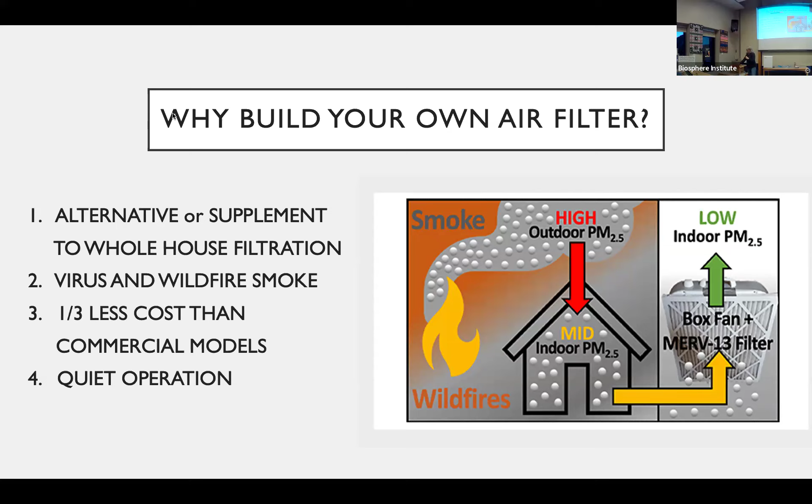So this is what the Corsi-Rosenthal box looks like. It's basically just four filters, four MERV 13 filters, with a box fan on top, and it's all just duct taped together. And I watched a video where a 10-year-old boy put one together. Easy.

The only downfall I think with this is a couple things. It's a bit noisy. You can buy quieter box fans, but it tends to be noisy. And it's also a bit bulky. So you can use different size filters around the square there, but you know, it works great in the classroom, but I think for a bedroom, it's just a little big.

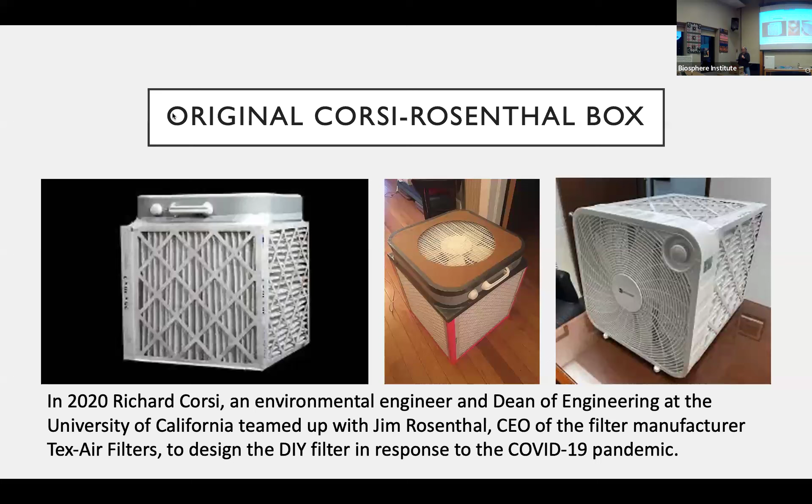There are different designs that have been coming out over the last few years. The first one there is, I think, one of the first designs that used the computer fans, which is what we're using, because they're very quiet. So instead of a big box fan on top, there's computer fans at the top, but still the same MERV 13 filters all the way around.

The second picture there is one, and you can use any size of filter, right? And so this is for a car. And I think this will be my next project, is to build one for a camper van, because I remember last summer traveling through BC and through some smoky areas and pulling into a campground and wishing that I had this with me or something. The vehicles.

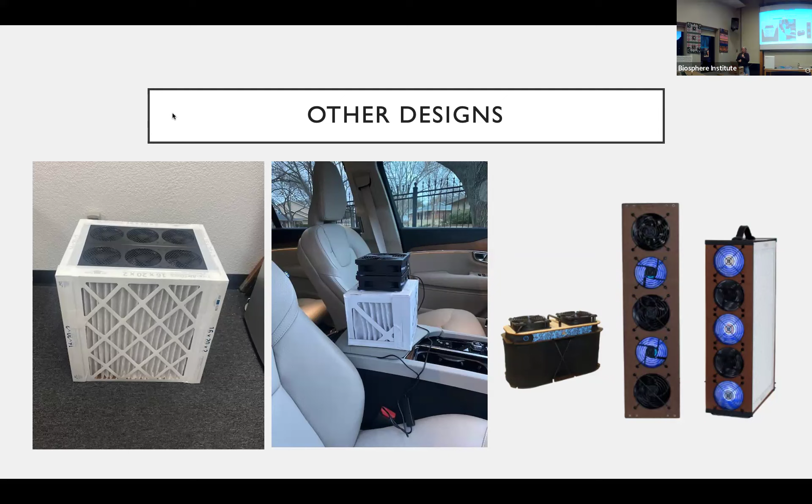And the third picture is getting closer to what this design is that you're going to be building today. These are kits that you can buy. It looks pretty much the same, but they run at $200, $300, $400. Buy a kit, put it together, or you can just do one of these. This design was actually worked and developed by Jess Harding at the back there. The one that worked out all the parts. And this is what it looks like.

MERV 13 filters is what we're using. The MERV is a way to rate filters. What you have in your house is probably going to be a MERV 8. And the MERV 8 is there mostly just to protect the motor on your furnace. It really doesn't do much for you. So if you want it to do anything for you, you're going to need at least a MERV 13. I have a friend building a house, a passive house actually. He's using MERV 16 on his air handling system.

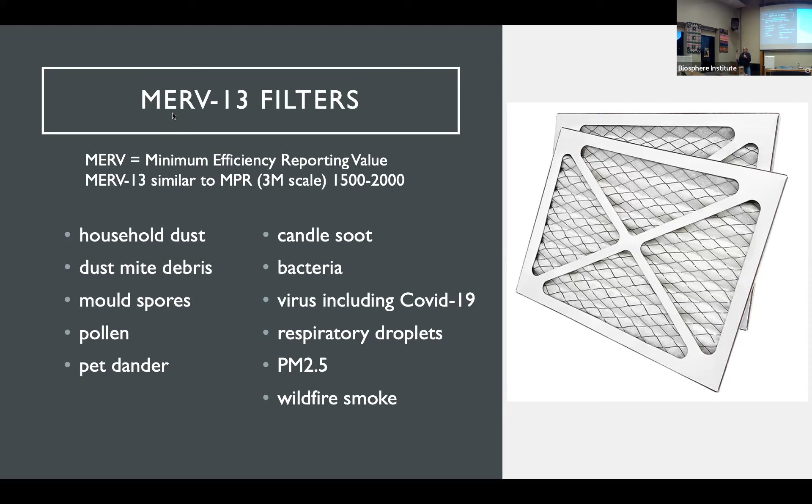MERV 13 will remove household dust, dust mites, mold spores, pollen. So this would be good if anybody has any spring allergies. It handles the bacteria, virus, respiratory droplets, and PM2.5 and wildfire smoke. Just a word about the difference between a HEPA filter and a MERV 13. So once you get into a MERV 17, you're looking at HEPA. So that's high efficiency particulate air filter. This one has a HEPA filter in it. But what you're going to be building today has a MERV 13.

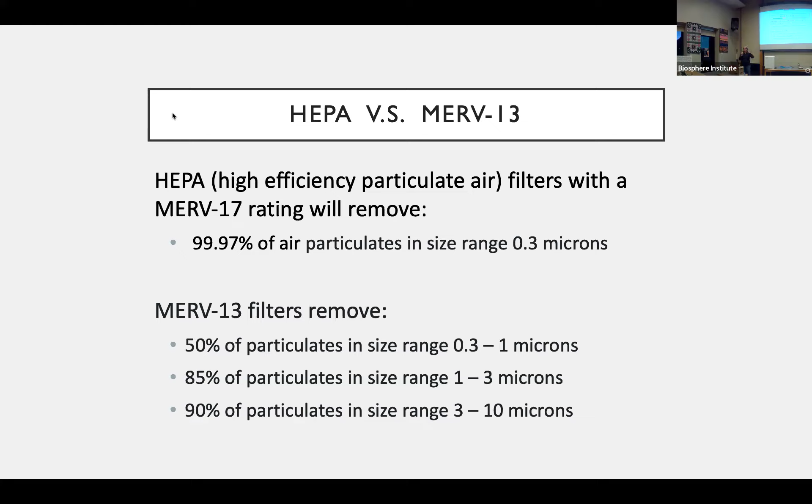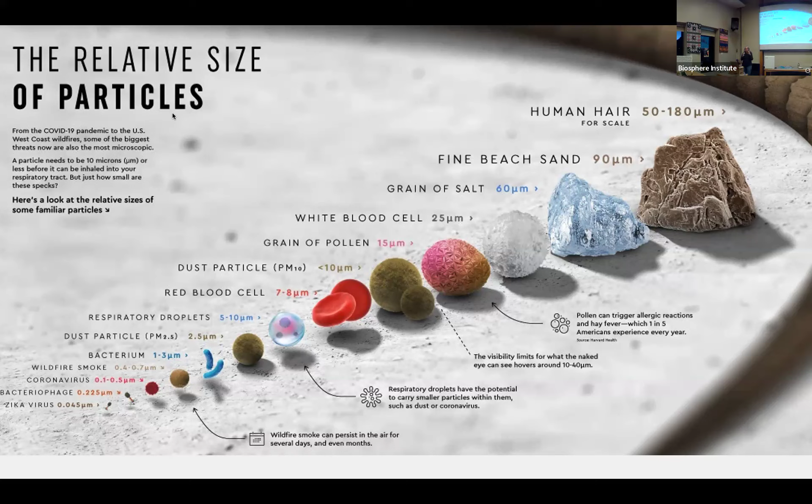A MERV 13 filter in the range for virus and wildfire smoke removes about 50%. Whereas a HEPA filter removes 99.97%, the MERV 13 removes about 50%. But here's my little description. So the little red one here, that's COVID virus. And the one right next to it, that gold one, that's the wildfire smoke. So they're pretty close to the same size, and they're pretty small. So the Corsi Rosenthal box with the MERV 13 filters has been shown to outperform HEPA air cleaners in particle removal on all particle sizes.

And why is that? Okay, so that's the research. So why aren't we building the HEPA filter? You're probably wondering. It's because filters are rated for a one-time pass-through with all these particles in it. The HEPA filter will remove 99.97%, whereas the MERV 13 will remove 50%. But in practical use, it's sitting in a room, and the first time through, it'll remove 50%. The next time through, it'll remove another 50%. And it keeps cycling through.

So in an hour, I calculated the volume of air that will go through this with 4 fans running, and it moves 250 or so cubic feet per minute. So in my bedroom, which is a 12 by 14 space, 8 feet high, it will cycle the volume of air every 6 minutes. That's pretty good. So the first time it goes through, it removes 50%. Second time through, another 50% of what's left. So within an hour or two, you're down to what the HEPA filter would be doing at less cost. And the MERV 13 filter has less static pressure than the HEPA filter, so you don't need as much power on the fan to get that moving.

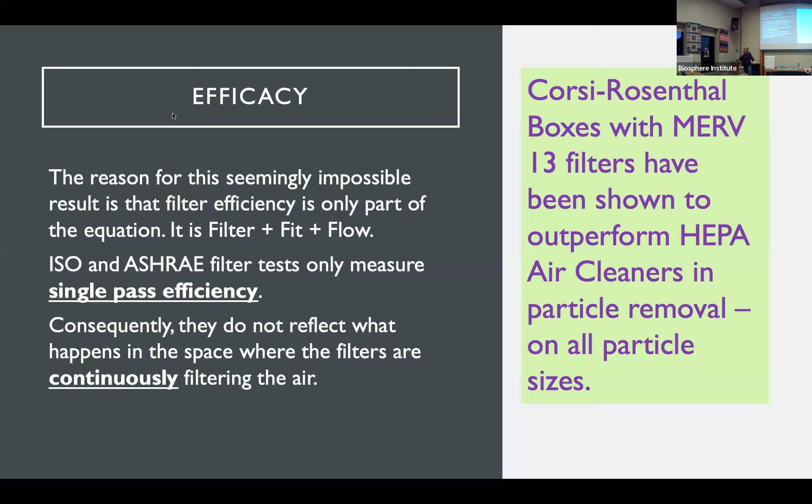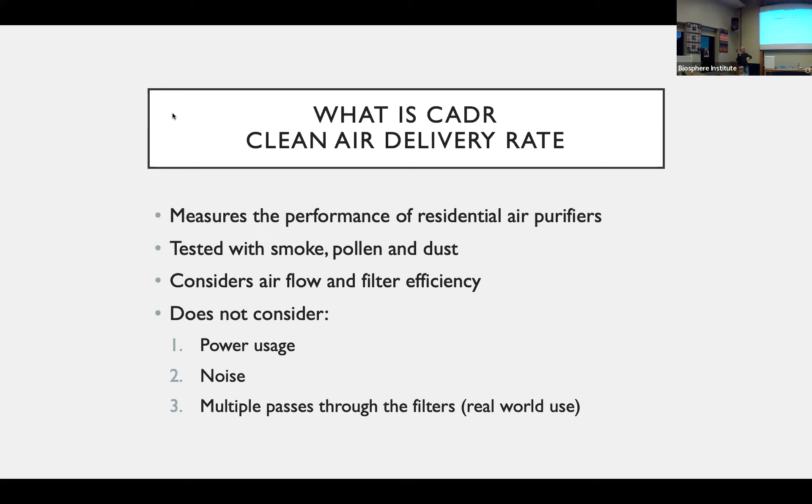What is CADR? That's the clean air delivery rate. This is how commercial units like this are compared. So they have a rating. It's the airflow times the filter efficiency. So when you're shopping for one of these, you look at the CADR rating and you can compare apples to apples. But it does not consider power usage, noise level, and it does not consider what I was just talking about, the multiple passes, like in real world use.

So for instance, energy use comparison: the original Corsi Rosenthal box would cost about $14 over 2 months to run. The commercial model with the HEPA filter would cost you $5.60. And the foam board one that we are building today, $2.42.

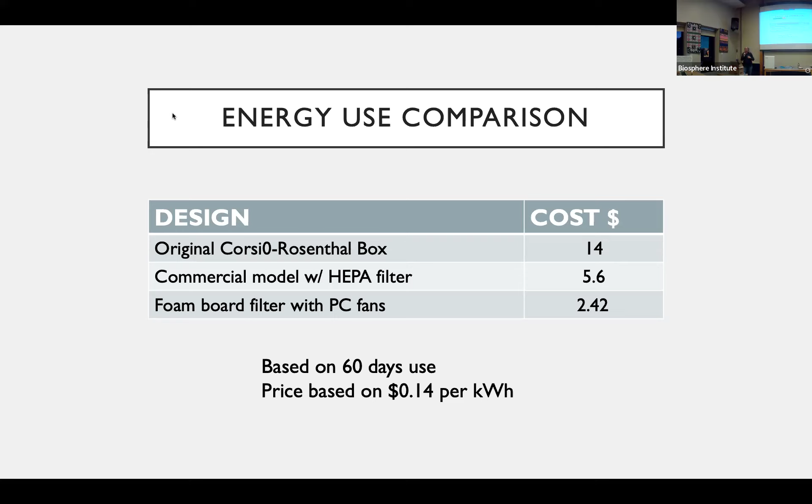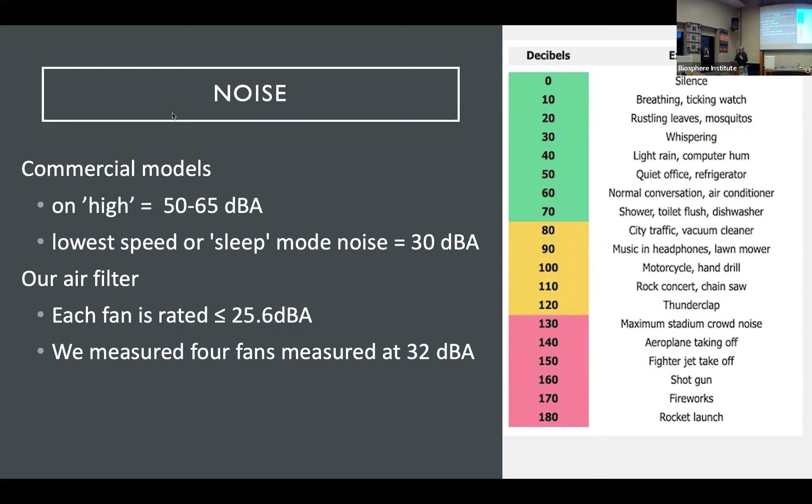Noise level: commercial models on high, 50 to 65 decibels. The one we're building, each fan, I think it's about 25 decibels. We measured when we built them in Hal's basement. All 4 of them running were about, was it 32, 33 decibels? That's still the level of a whisper. It's something that you can live with when you're sleeping.

The research: Corsi-Rosenthal have done experiments verifying that one box fan effectively removes particulates from a whole classroom. The MERV 13 can usually reach higher CADR with less noise and energy than the true HEPA filter. Homes that used air filters, in addition to closing windows and doors, were able to cut the amount of those tiny PM2.5 particles floating inside them by 2 to 3 times, according to research from the University of California.

The study of a home-built air purifier to remove wildfire smoke using Corsi-Rosenthal showed that particulate matter between 1 and 10 micrometers in size was reduced by about 75%. Impact of wildfire smoke events on indoor air quality and evaluation of a low-cost filtration method is linked there. I can send that to you if you're interested. California's been having a lot of wildfires in the last 10 years. They're ahead of most of us, and they often get to do their research ahead of us.

So there is actually research on going in your house to escape the outdoor air quality, closing your doors and windows. And it's shown that within a day or two, the inside air is about as bad as the outside air. Of course, it really depends on your building envelope, how old your house is, how weak your walls are. The walls of your house will protect you for a while, but not for the long term. So you really do need to do some indoor filtration to clean it.

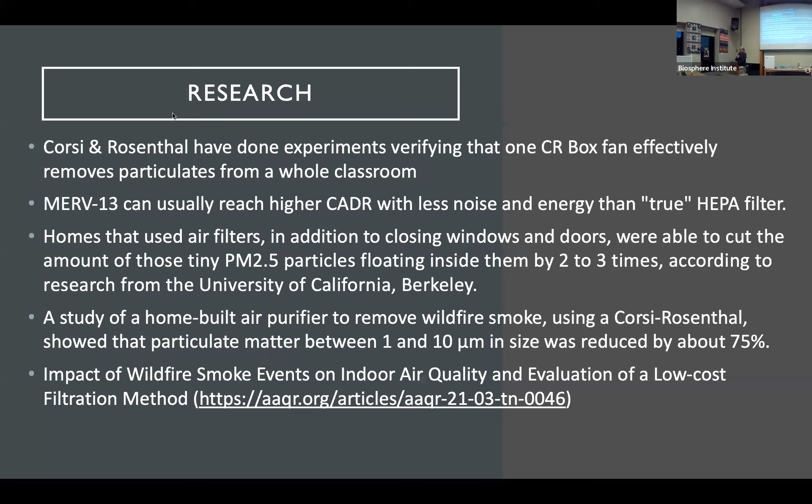Questions? I'm anticipating some questions like, how long do the filters last? That is a good question. I guess it depends on how smoky it is or what your purpose is. If they look dirty, it might be time to replace. If we get another month-long wildfire smoke where you can just barely see the outline of the hills, then I would probably replace the filters after about a month.

Is there a fan speed control? No, it's either on or off. Okay. What is the airflow through the filter? I think I mentioned each fan does 66 cubic feet per minute, 4 fans, 265. Cleans the bedroom every 6 minutes.

Now I know that a portable air filter sitting in a room will tend to recycle the air that's closest to it first. It's not going to grab the air over in that far corner right away. But because of the physics of random particle movements, if this air is clean and that has more particles in it, it moves from an area of lots of particles to none. So it'll eventually move over and get filtered. And has this air filter design been tested and certified? It has been tested. There is research online, but it's not been certified.

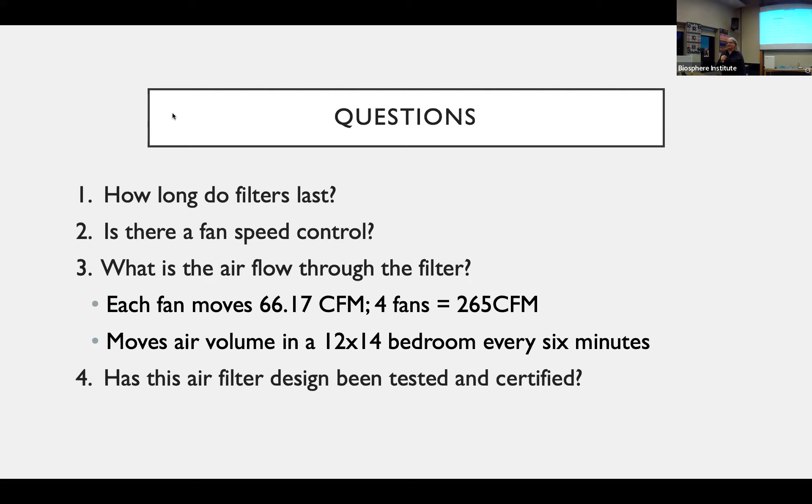Thanks, Jess. Anybody else? Any other questions? We can, yeah, we should start. So that's the end of the presentation portion. Now we're just gonna help.